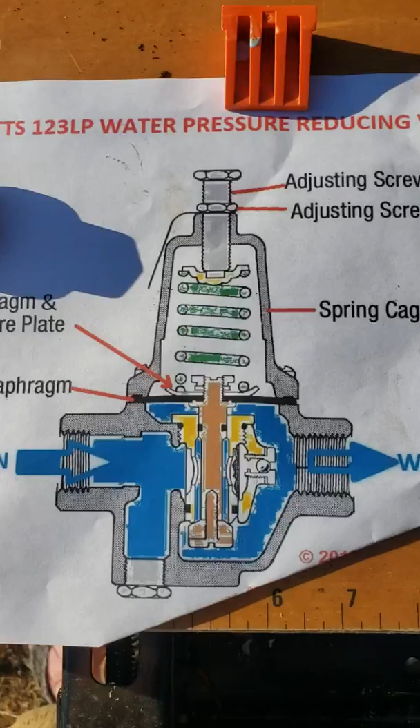Okay, so what I want to talk about today was PRVs, pressure regulating valves, also referred to as pressure reducing valves, or by their acronym, PRVs. Common in irrigation. This one came off an irrigation system, but they find their uses in industrial applications, residential and commercial plumbing.

Like I said, irrigation, and their purpose is to regulate pressure. Some areas have varying pressure, different altitudes, different water systems, different water purveyors, different pumps. We deal with a lot of different pressures.

Depending on where you're at, there may be some requirements set by the city or the local water department. But if you're at the bottom of a long hill, just from physics, you'll end up with higher water pressure, and depending on how much that is, it can be destructive in a house or to an irrigation system. So the neat thing about PRVs is they can maintain an outlet pressure.

At varying flows -- if you had a ball valve and you cracked it shut with a constant flow, you could maintain a certain discharge pressure, downstream pressure.

But if you had off and on and all these different things, the flow and pressure might even equalize across it. We see that with leaking gate valves where water shuts off, but over the course of a month it basically equalizes when it has nowhere to go, until the pressure, even with it being shut, equalizes across to the discharge side.

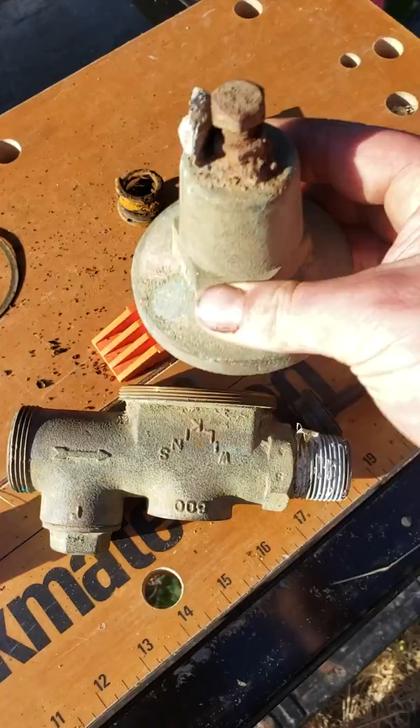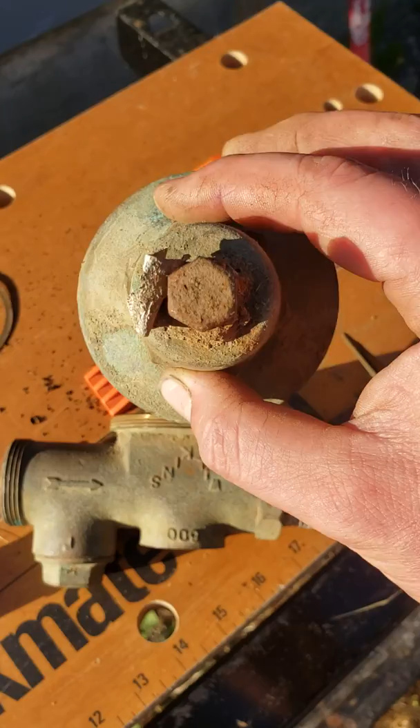So you might have a garage and you can see the bonnet, or sometimes I almost refer to it as a bell sticking out of the wall. Sometimes you might open up an irrigation box in the ground and see the top of one of these, or maybe you've got exposed piping and can see the whole unit there.

These units do have a limited lifespan. They are rebuildable. I'm not always a huge fan of PRVs -- sometimes they can bring about more problems, and there are other tools we can use in irrigation, like pressure regulated master valves. There are other steps we can take depending on what the pressure is and if it's deemed excessive.

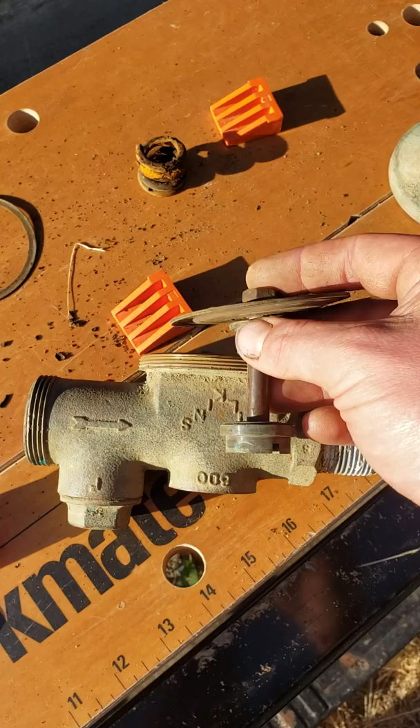So the way a PRV works is we have a stem, a diaphragm, and another seat in the bottom. Water comes in, and its first step is to move up to the diaphragm. It's going to push up and try to block the flow of water to the discharge side.

We have a spring on top, which in this picture you can see what's left of it. That spring lives inside the bonnet. So the spring is acting against the surface area of the incoming water, and it's trying to push that valve -- trying to basically push that stem down and allow the water to pass through the valve.

Now, looking at my index here, if you turn the adjusting bolt down by loosening the lock nut, turn this in clockwise, the bolt extends downwards into the top of the bonnet and compresses that spring. The spring compressed will exert force, and so if you want to increase the pressure, you're going to basically push that valve open.

If you turned it counterclockwise and took that spring pressure off, there's less pressure pressing against the incoming water, and the valve will want to stay shut.

So in the case of this, when the spring rotted away with nothing else to act against that water pressure, the valve failed shut, which is probably the best way it could fail. Because basically, A, it told us we had a problem, and B, if it was really a sensitive application, there wasn't any other damage due to high pressure downstream.

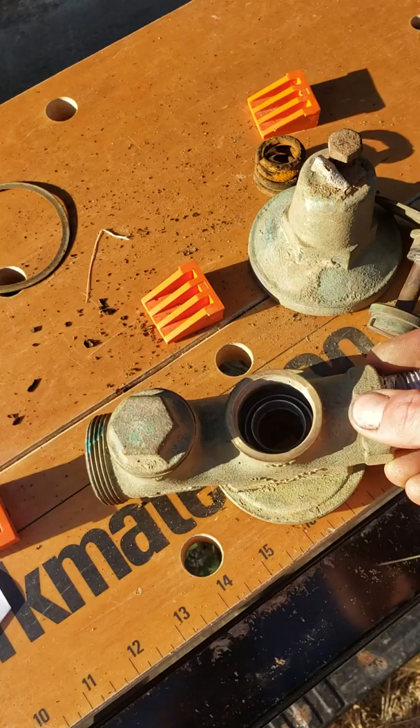So this basically got pushed shut. If you look at the bottom, I've removed the other cap off this -- you can see that kind of ring down there, and that's where the bottom of this, pointing my thumb, wants to engage down.

So let's look at a cutaway drawing. Now, it's not my drawing -- it was originally a Watts drawing that I found online, and I found a colored one courtesy of, I think, InspectAPedia.

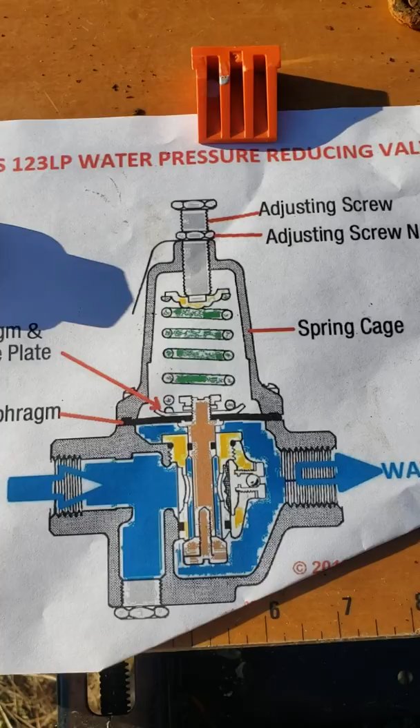So, incoming water -- now this is a Watts. The one we have over here is a Wilkins 600 series, and generally I prefer Wilkins over Watts. But in the case of the Watts, incoming water comes up to the diaphragm and wants to push up.

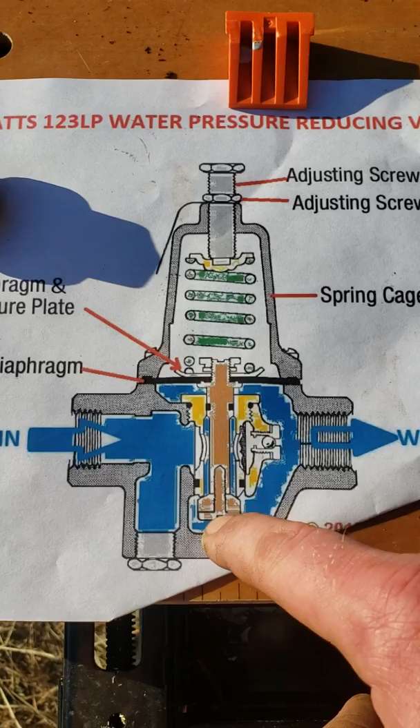Water then has to flow down past the seat and out the downstream side. When the spring goes away, water basically pushes against the diaphragm, pulls that stem, or I guess you may even call it a plunger, up against the lower seat. Water cannot move through that.

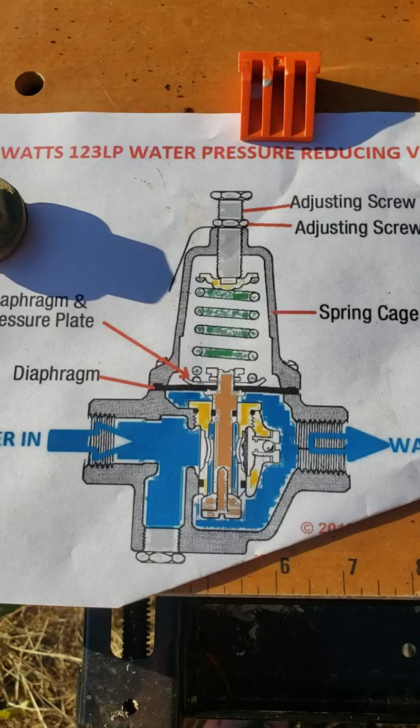So that's what happens -- that's how these things fail. In the case of the Wilkins, it failed shut. The spring basically rotted away to the point it exerted no pressure against the diaphragm, and water couldn't flow through it -- it was restrictive, couldn't flow through it.

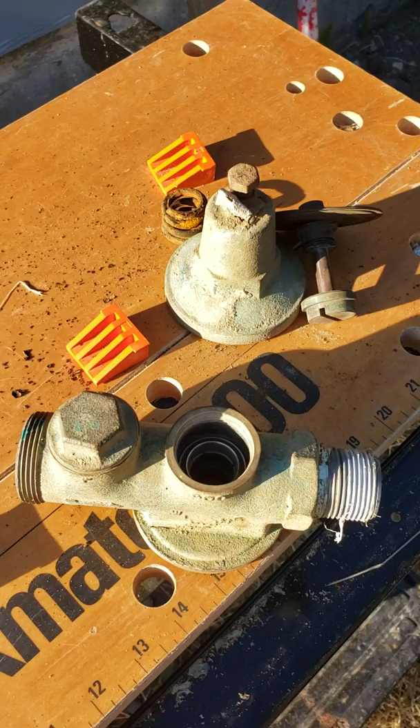So that's what I want to go over -- that's how this failed. The other thing too, if I remember right, you can also get a pressure gauge adapter for this. I'd always suggest installing a pressure gauge upstream and downstream of a PRV so you can monitor it, to see if it's failing.

If you want to make any changes, it's a lot easier to have those gauges right there, so you're not running back and forth trying to do everything.

Also, this is a single union, so there's an integral union that lives on this end with an O-ring, similar to a meter spud or meter tailpiece. So there's a flat gasket, and then you have basically almost like a straight cut thread that goes on there. So that's not MPT. Now on this side we do have NPT, a 1-inch FIPT in here. So just wanted to go over that.

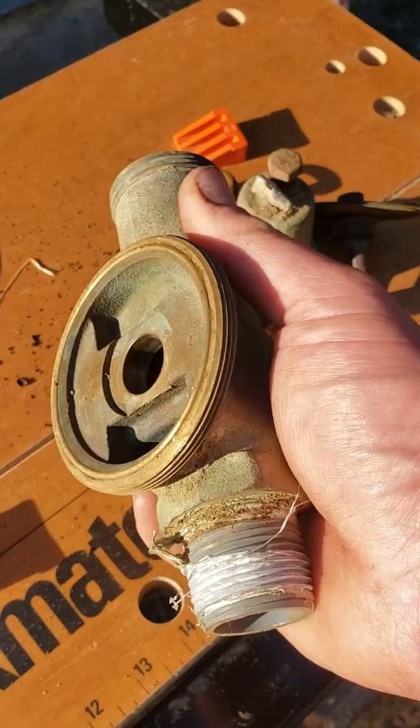Like I said, these units are rebuildable. You can find out more from Zurn by looking on YouTube.